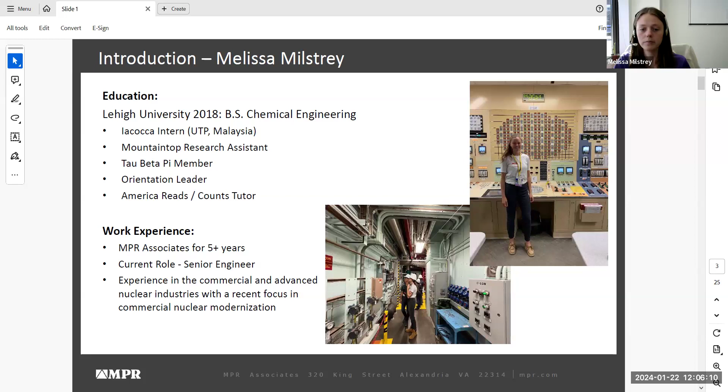So a little bit about the company I work at, MPR Associates. As Andy mentioned, we're a specialty engineering services and consulting firm. Basically, we work on solving challenging and interesting problems for our clients in a variety of different fields. The three main areas we work in are power generation and energy, which is most relevant to this class today.

So we're supporting utilities, including the domestic nuclear fleet, and we also work in advanced energy solutions and T&D, or transmission and distribution of those energy resources.

Another one of our business areas is the federal government. So we're supporting government branches like DOE, Department of Energy, and DHS, Department of Homeland Security, with large scale and complex projects. And then lastly, health and life sciences.

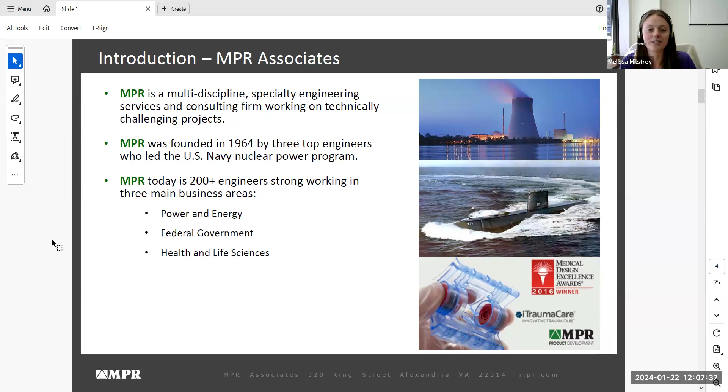We've grown a lot since our company was founded in the 1960s, from 3 engineers all the way up to 200 engineers strong today.

So to provide some additional context for the rest of the presentation, I can talk through what commercial nuclear power and nuclear power in general is. Some of this may be common knowledge to some people on the call, but I just wanted to provide that overview to the group.

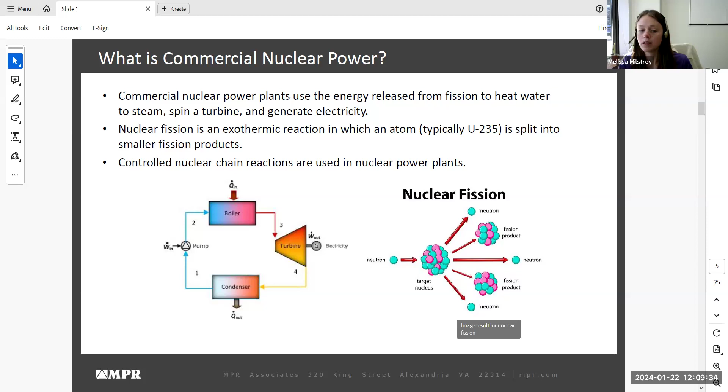Now I'll dive a little bit deeper into the types of reactors used in the United States specifically, and then provide an overall snapshot of the US fleet, so how many reactors there are, the life of those reactors, et cetera.

It's important to note that there are over 400 reactors across the world. It's not just the technology used in the US. And the general modernization concepts I'm covering today during this presentation are not just applicable to the US, they're applicable across the world. Just focusing in on the US as a snapshot here today.

The U.S. fleet is governed and regulated by an agency called the U.S. Nuclear Regulatory Commission, or NRC, to help ensure that the nuclear fleet operates safely.

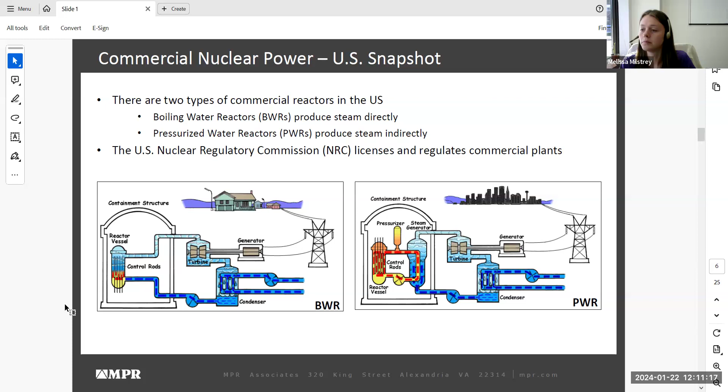So the first commercial nuclear power reactors started up about 60 years ago, in the 1960s. Between the 60s and 90s, dozens of reactors were built all over the US, and it peaked at 112 reactors in the 1990s. Today, there are 93 operating reactors at 54 different sites.

That reduction from 112 to 93 is primarily due to the premature shutdown of some reactors due to financial challenges. There is some good news, though. Vogtle Unit 3 is the most recent reactor that began operation just this past year, so it's a really exciting day for the nuclear industry. The sister unit, Vogtle Unit 4, is expected to come online this year. So some new commercial nuclear power reactors are coming online.

The average age of these 93 operating reactors is 42 years old, so they're getting up there in age a little bit. These 93 reactors contribute just about 20% of the country's overall electricity. But importantly, these reactors contribute half of the carbon-free power sources in the US. Nuclear power is unique in that it's always on, operating 24/7 to provide that carbon-free energy source, at an average capacity factor of over 90%. So it's a good, reliable source of energy for the US.

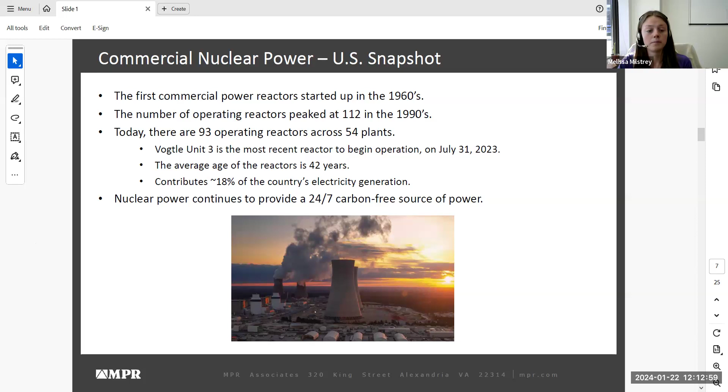Now I'd like to take a moment to talk about energy trends and predictions for the US. A major focus in the energy industry, which you've probably heard about through these seminars or other classes, is decarbonization. Specifically in the US, our goal is to shift to 100% carbon pollution-free electricity by 2035.

So I was just going to explain what carbon pollution-free electricity means, since it's a newer term. Carbon pollution-free means it can come from energy resources like renewable power, wind and solar, carbon-free resources like nuclear power, and even carbon-emitting resources like fossil fuels that use carbon capture technology, so it's not emitting greenhouse gases.

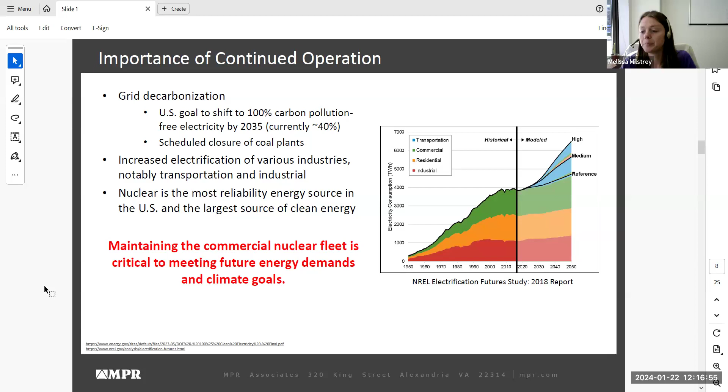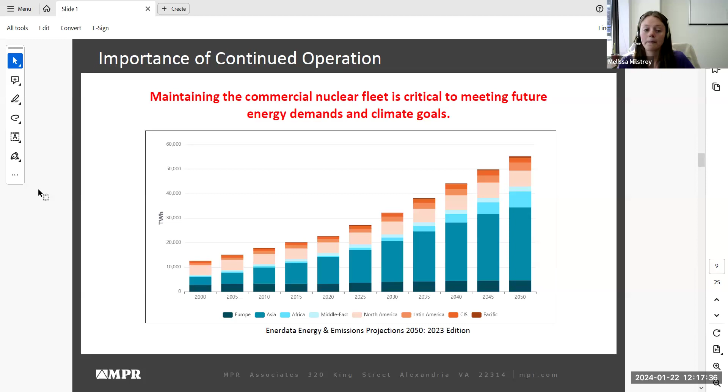And so that's where modernization comes in. That'll help us to keep the nuclear fleet online and operating to help meet those goals that we talked about on the last slide. So modernization is the use of more modern technologies and processes to help improve the operation and maintenance of various assets.

Modernization of the energy sector is becoming increasingly popular over the last few decades. Although it is becoming more popular, nuclear power plant modernization specifically has been moving at a relatively slower pace compared to some of the less regulated industries like natural gas. It's partially because nuclear is pretty heavily regulated, so it can be costly and timely to make those changes. But luckily, we're starting to see a real uptick in the focus on and utility investments in modernization.

Modernization in general is a pretty broad term. It can mean a lot of different things, and it can range from actually installing a new piece of equipment or component in a site, or to simply using an iPad for a process that used to be done on paper. So it's a pretty broad bucket of different changes on site.

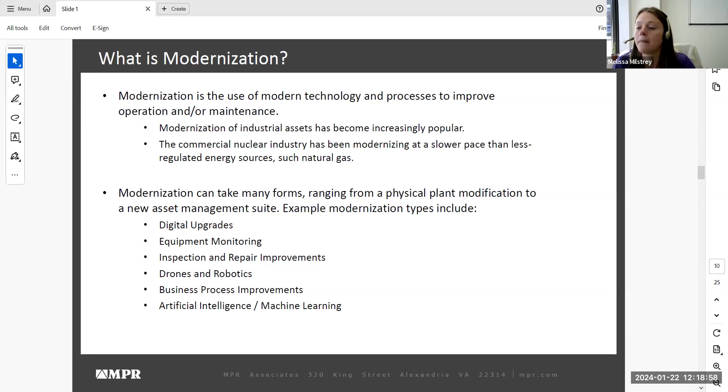There are multiple drivers for modernization. Some of those drivers include the fleet's age. As I noted on the previous slide, the average age in the US of the fleet is about 42 years old. So as the fleet ages, equipment obsolescence becomes more of a risk. Equipment obsolescence means that a component or system is outdated and difficult to replace or find vendor support for. Replacing or upgrading to newer, more modern equipment can help to reduce this obsolescence risk.

Another main driver is cost reduction. So making nuclear operation cost competitive with other sources like natural gas, which has historically been relatively cheap to produce, or renewables, which are often subsidized.

And the third here is decarbonization. Touched on this on the last slide. As efforts to decarbonize become more and more common, it's more attractive to keep the nuclear plants online.

So there are also a few major benefits of modernization directly to the utility.

I think I got muted. Can you guys hear me still? Okay, perfect. Yeah, that was my error. I'm sorry. No problem. No problem, just making sure.

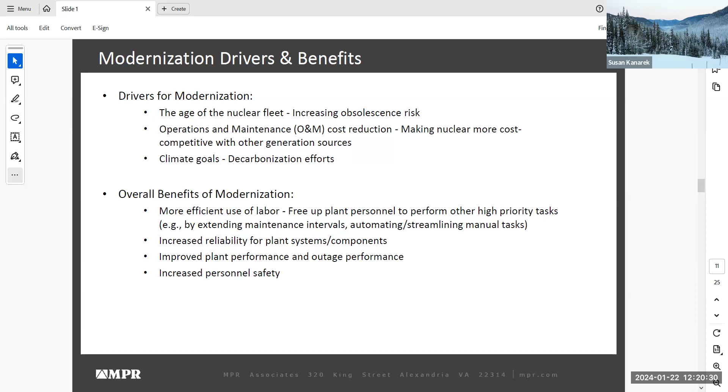Some of the benefits directly to the utility are more efficient use of personnel time and labor. Automating processes, streamlining processes, and eliminating some tasks using modernization can help to save personnel time, so they can go do other things at the site and other high priority tasks.

Modernization can also result in increased reliability for plant systems and components. As an example, advanced inspection techniques can help to identify an issue in a component like a pump before it becomes a failure problem.

Third here, improved plant performance and outage performance. Nuclear plants go into outages for component maintenance and fuel loading on a routine basis, and outage efficiency is an ongoing focus area for the industry, so the team can get the reactors back online and producing electricity as soon as possible. There are some modernizations that help to make outage execution and outage planning more efficient as well.

Last listed here, but certainly not least, is increased personnel safety. Minimizing, eliminating, or replacing tasks with modernized improvements can help to decrease the instances of radiological and industrial risks. That improves safety for those who work at the site, and also contractors who happen to be on site.

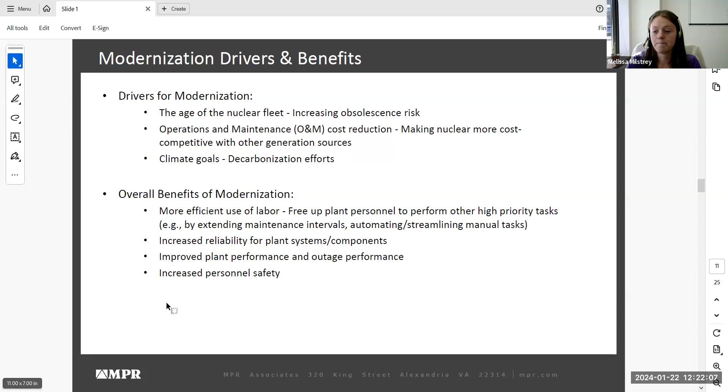So now that we have a 10,000-foot view of modernization, I did want to dive deeper into a few different modernization topics that are being implemented or piloted at nuclear power plants. So the first I wanted to cover here is robotics.

Robotics are a great method or an alternative to executing manual tasks that are done by a human. Robotics actually have a pretty long history of applications in nuclear power plants. They've been used since the 1970s timeframe, helping with cleanup at TMI-2. Despite that pretty long history, robotic usage historically has been pretty limited to specific one-off tasks, but this is beginning to change and advance as robotic technology advances.

So with that, some robots or some utilities are beginning to purchase more general purpose robots that they can deploy on an as needed basis. One specific example of that is the Spot robot, which is a Boston Dynamics robot that's become pretty popular in the nuclear industry. You might have seen some videos of this robot walking around. It kind of looks like a dog walking around.

Implementation of robotics is most useful in plant locations that are either not accessible to humans or that are hazardous for humans to enter.

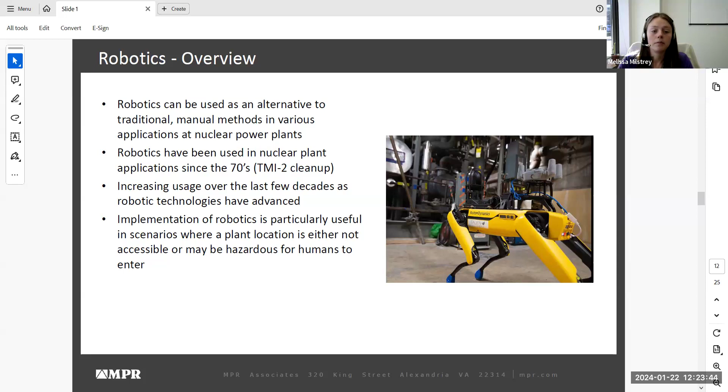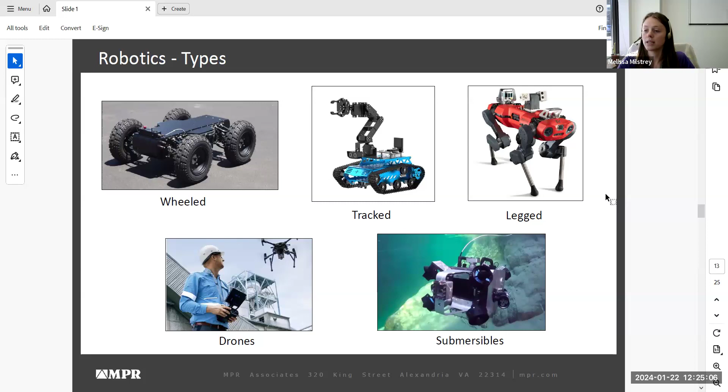Most robots can be controlled by an operator, using a remote control, or function autonomously. That means they have a pre-planned route that is directed and they go without remote control operation. To help with autonomous operation and also remote controlled operation, many robots contain sensors that can help them avoid obstacles, to avoid running into something. That is particularly helpful again with the autonomous operation where the robot is not actively being controlled by a person.

It's pretty cool to have robots at a nuclear plant or at any utility, but without the proper tools installed on the robot to do things, their usefulness is pretty limited. So that's where payloads come into play. Payloads are those different tools that help you actually carry out a robotic mission.

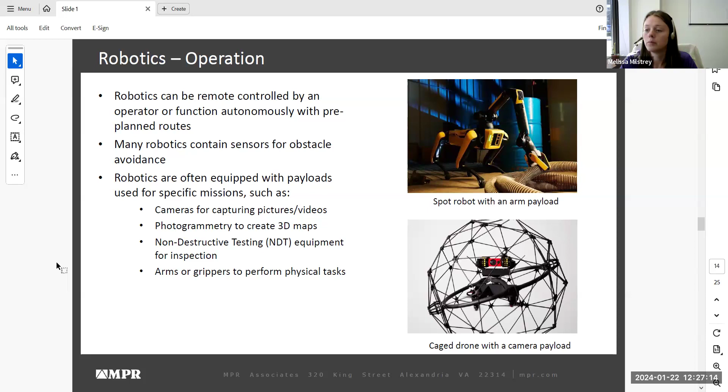So the most common use case at nuclear power plants is currently visual inspections and component testing in those hazardous or hard to reach areas. There are some other use cases such as maintenance, rad protection, common routine surveillances, and then other physical task execution like cutting a pipe.

The site's rad protection team is required to go into different areas around the site and take manual readings of radiation levels. Robotics can be equipped with dosimeters and other radiation level reading equipment and sent in place of humans to take those surveillances. This is a really good use case because it helps save time for the rad tech, and also saves personnel time and dose from entering high radiation areas.

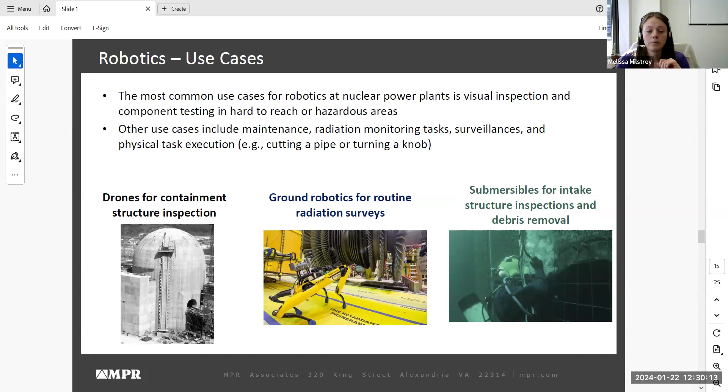Robots can also help reduce costs by eliminating manual labor and preventing unplanned down-powers. Sometimes manual inspections may require the plant to reduce power so that a person can safely enter a given area on site. If a robot is sent in instead of a person, that may help avoid that power disruption and keep the plant running at normal operation.

And then lastly, improved task execution. As an example, if a robot is able to collect additional data, since it can reach different areas and stay longer in certain areas, that can improve the amount and quality of data collected from that task.

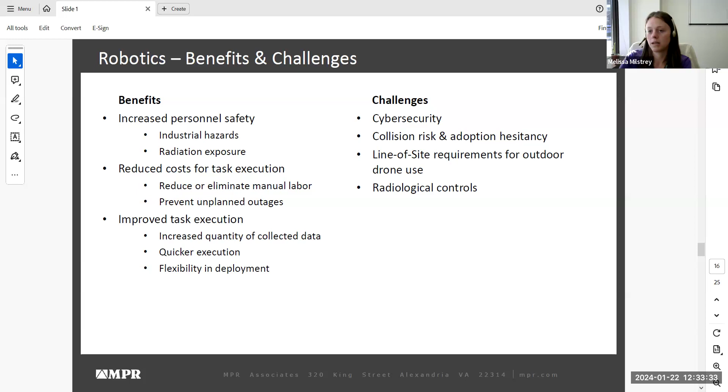The next modernization topic I wanted to touch on is online monitoring of equipment. To give some background, operators on site routinely perform rounds to collect different measurements of equipment parameters. There's an opportunity to modernize this activity with online monitoring, which involves installing permanent sensors on pumps, motors, turbines, or other equipment to collect data and transmit that to a central computer.

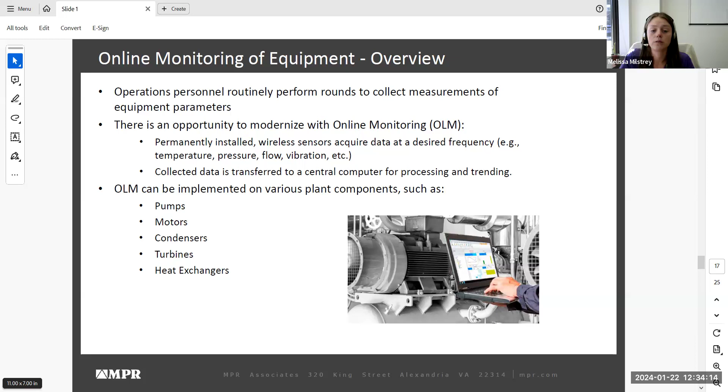At many utilities, the data collected is sent to a central repository called a Monitoring and Diagnostic, or M&D Center, with dedicated staff who look at the incoming data. If an adverse trend is identified, the dedicated staff will take a look at it and determine if any action on site is needed.

There's also an opportunity to use AI and machine learning with advanced pattern recognition models. This software can identify trends in plant data and make predictions for equipment health. This trending of data and prediction can help the site transition from time-based maintenance to condition-based maintenance.

In a more traditional time-based maintenance scheme, the site goes in and inspects a piece of equipment at a set time interval. So for a given valve, the site has to go in and inspect and perform maintenance on this valve every 2 years, regardless of if this valve has ever had any issues or a history of issues.

In the recent past. But with condition-based maintenance, the site can use the actual condition of that equipment to make informed decisions on what maintenance and inspections need to be performed. This helps to eliminate potentially unnecessary inspections that can save time and money and avoid going in and touching equipment and causing other issues. This also helps to put resources that would otherwise be spent on those time-based maintenance activities to higher risk equipment, which is really important, especially during outages when that efficiency factor is key.

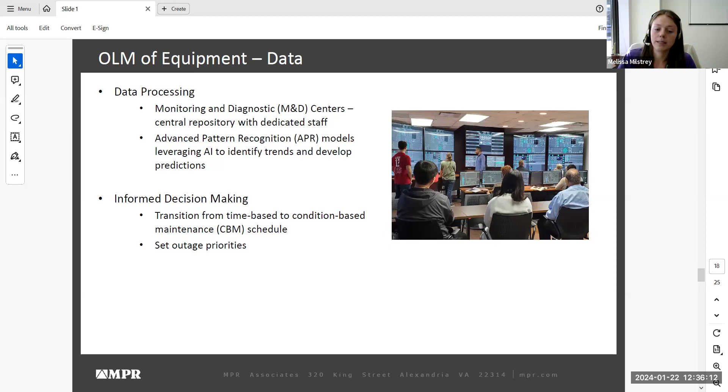Online monitoring can also provide more frequent data and higher quality data, which can increase the site's awareness of equipment health, and in turn helps to avoid equipment failure through that earlier detection mechanism.

Some of the challenges with online monitoring include wireless bandwidth and coverage. When you use these sensors, you're collecting a lot more data, you're transmitting a lot more data compared to traditional methods. So the site's wireless coverage, where Wi-Fi or other wireless protocols are available, and the bandwidth to support that data transfer must be ready before you can effectively install this equipment.

Similarly to robotics, cybersecurity is another concern, making sure that the data that's collected and transmitted is secure.

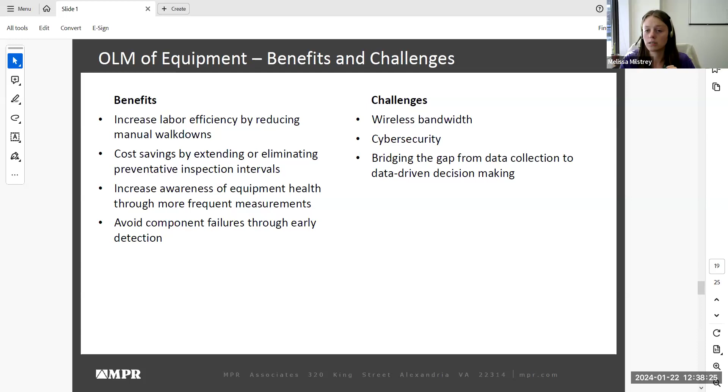The last modernization upgrade I wanted to touch a little bit deeper on was digital instrumentation and controls, or digital I&C. I&C involves measuring and controlling plant process variables, like controlling process flow through a given route, temperatures, levels in tanks, and things like that.

The US fleet was originally built with analog control systems, which are considered the older and legacy equipment. The aging components have some obsolescence risks with discontinued vendor support. So there's an opportunity to modernize with digital I&C, which uses computers to process signals. Digital I&C is pretty widely used across other industries and has more recently been incorporated into the commercial nuclear sector more commonly.

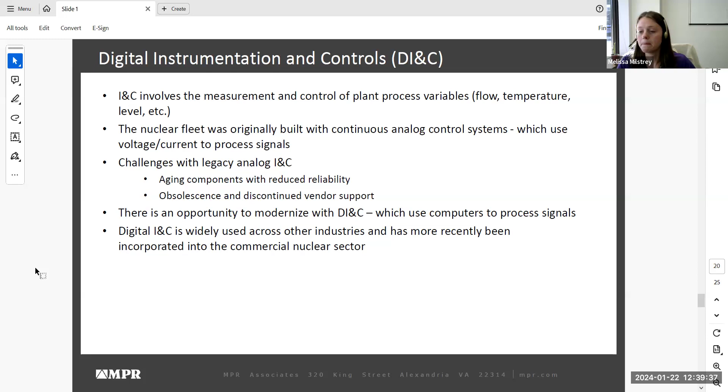Some of the benefits of digital I&C: there are more vendors available with the new technology, potential to increase reliability and accuracy with new technology, which in turn can improve plant operation. Also, many digital control systems come with self-diagnostic capabilities, potentially helping you identify issues in real time. And lastly, since digital I&C uses computer systems and implements software, this allows a bit more flexibility with the control system software.

There are also a few key challenges associated with digital I&C. Digital I&C changes tend to be some of the most expensive modernization improvements. They're really high cost, but also high benefit improvements for the sites. Similar to the other modernizations, the common theme here is that cybersecurity needs to be appropriately considered and controlled when transferring from analog to digital I&C. Licensing is another challenge, making sure that the system functionality is retained when transitioning from one I&C type to another.

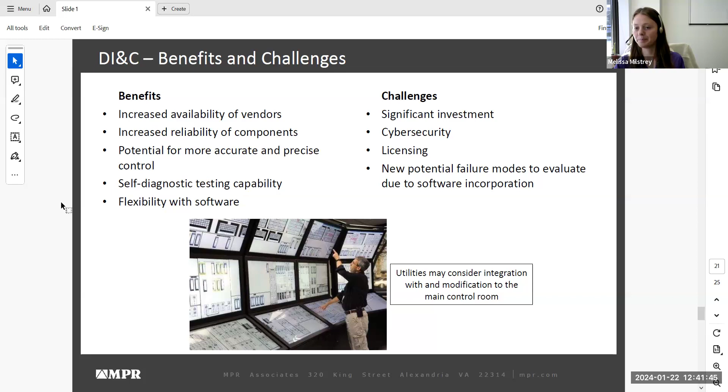I wanted to take a moment to touch on a few modernizations being considered in the industry and piloted. The first is advanced fuel. Accident tolerant fuel introduces new materials into the fuel pellets or the cladding layer to help improve operation and make it more accident resistant.

Materials like chromium can be coated on the outer cladding layer, which can increase the fuel's resistance to things like oxidation or debris. Materials can also be doped into or mixed into the fuel pellet during manufacturing, which can reduce the risk of damage to the fuel.

There are also some vendors exploring increasing the maximum enrichment of U-235 in fuel from 5% to 10%, I believe. Increasing this enrichment level could help save the plant money on having to purchase fewer fuel assemblies, and can also help the reactor achieve higher burnup, allowing it to operate for longer fuel cycles, so they go offline and refuel less frequently.

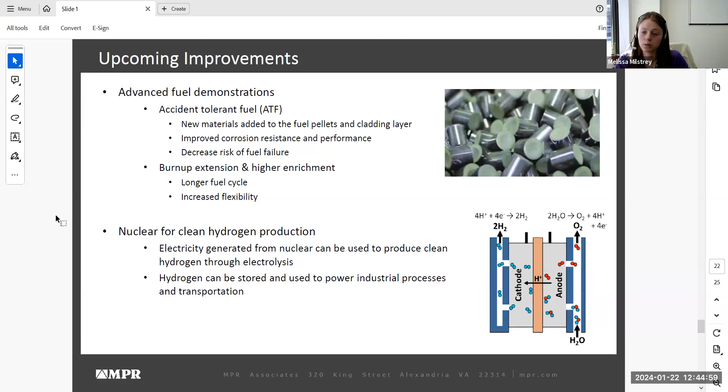Now that we've gone through some of the exciting examples of modernization, I wanted to touch on how wide-scale modernization is actually feasible, and what some of the enablers are to making modernization possible.

One of the first enablers is life extension plans. Many utilities are considering extending their license for operation so their units can continue to operate for longer. These strategies often rely on equipment upgrades, which presents an opportunity to sync modernization improvements with life extension strategies, and that can help improve the business case for modernization when compared to performing the modernization improvement alone.

Fleet extension also improves the business case for modernization since the utility will be, in theory, operating for longer, so they can recoup the benefits of those investments for a longer period of time.

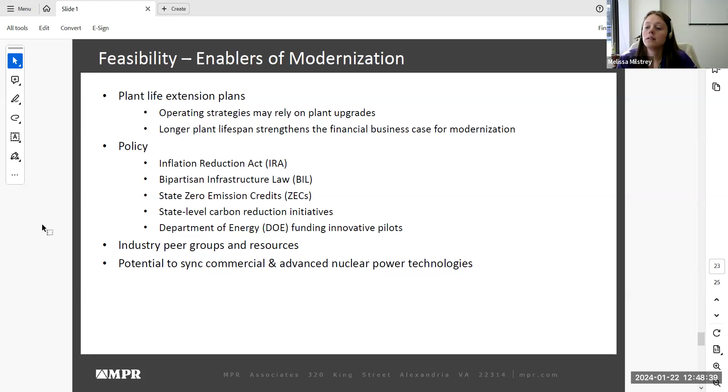And then there's also obviously a lot of challenges to modernization. The first being that modernization often involves a significant investment, and there are often competing site priorities for those resources. So for example, it could be challenging to divert labor or financial resources to these more forward-looking modernization projects when you have these near-term pressing issues like a pipe crack or something like that, that will imminently impact operation.

Another challenge is in licensing. So first of a kind improvements that may involve licensing changes can be timely and costly. So that has been a barrier to modernization.

And then in general, challenges to the nuclear power sector, just general challenges may also impact how modernization shakes out. So one challenge currently facing the industry at large is the nuclear workforce. The workforce is facing a shortage in skilled trade - things like welding and electricians, and then also in engineering staff. And this issue will potentially become even an increasing issue because of the advanced nuclear deployment. We're going to need even more resources and more staff in order to support both the existing nuclear and advanced nuclear industry.

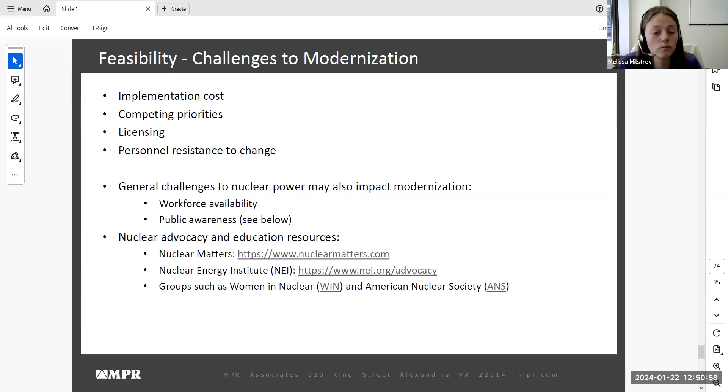So I think that's all the content I had, but wanted to open up and see if anyone had questions or things to discuss based on what I've talked about here today.